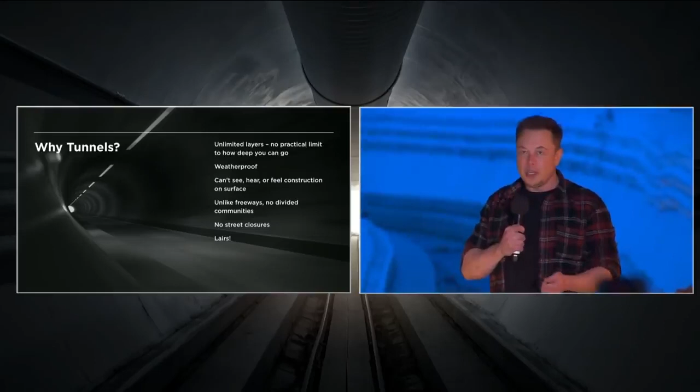You could go with a flying car, but there are some drawbacks to flying cars. They are essentially a helicopter with wheels. And they make a lot of noise, there's a lot of wind force, and the probability of something falling on your head if there are a bunch of flying cars around is much higher than if there are not.

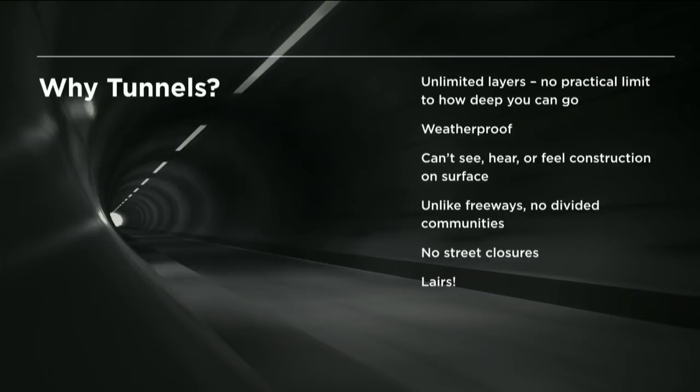But I think the great thing about tunnels is that there's no limit to how deep you can go. They're weatherproof, that's the other thing about flying cars - if there's snow or rain or a hurricane or something, suddenly you can't go anywhere. But tunnels are immune to weather. It does not matter if there's a tornado, it doesn't matter if there's an ice storm, it doesn't matter what's going on above ground. If you're in a tunnel, you're safe and secure.

The other thing is you can't see, hear, or feel the construction. When you ride the tunnel, you'll see the entrance that's basically in the backyard of a house. The neighbor of that house, when the boring machine broke through the other side, was watching TV. The neighbor did not even stop watching TV - that's how subtle it was. So you will not hear, see, or feel the tunnels being created.

Unlike freeways or any kind of surface transit, it will not divide communities. You don't have to basically railroad through communities. You can weave the boring system tunnel network into the fabric of a city without changing the character of the city. The city will still feel the same. You're not going to get in anyone's way, you're not going to obstruct anyone's view. You'll have this revolutionary transport system, and your city will still feel like your city.

And lairs, of course - forgot to mention lairs, plural.

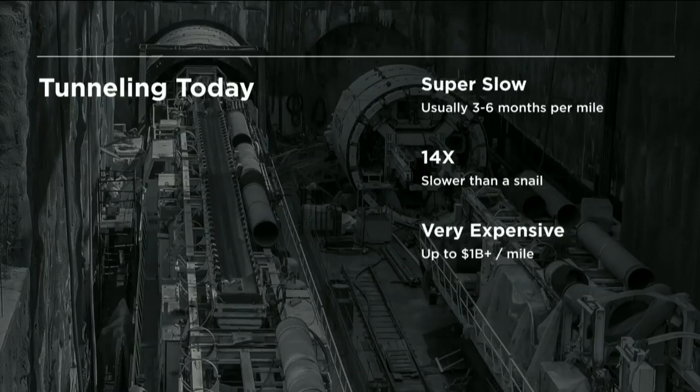So what's the problem with tunnels? They usually take a very long time to build, and they're very expensive. Typically, a tunnel will take 3 to 6 months per mile. In some cases, it will take a year per mile. And they can cost up to $1 billion per mile. In fact, the LA subway extension that just got completed cost $2 billion for 2.5 miles. There was a subway extension in New York that I think cost $2 billion for a mile. So clearly something needs to be done to revolutionize tunneling technology. We need to be able to build tunnels way faster and for a hell of a lot less money.

Just to characterize it, the fastest tunneling machine in the world right now is 14 times slower than a snail. So when I say we're gonna have a tunneling machine that can do a mile a week, we're not talking about the sandworms of Dune here, okay? It's still slow, it's just as fast as a snail - you will be able to escape it. All right, this is our snail. This is Gary the Sixth. Yeah, it turns out snails don't live that long, so this is Gary the Sixth.

But this is our goal. We must be faster than a snail. So what are we doing to increase the speed of tunneling?

As we got into it, we learned more and more about tunneling and why it takes a long time. First of all, in a given hour of tunneling, only about 10 minutes is spent actually digging. The other 50 minutes are spent erecting tunnel reinforcements, laying down tracks, doing logistics, and other stuff. So just automating the segment placement and solving the logistics issues will actually give you about a 5-fold increase in tunneling speed.

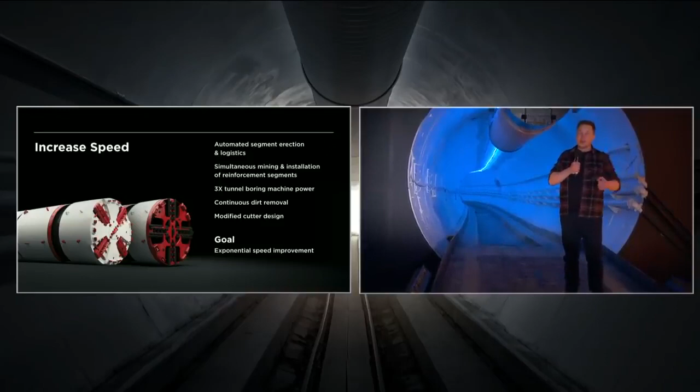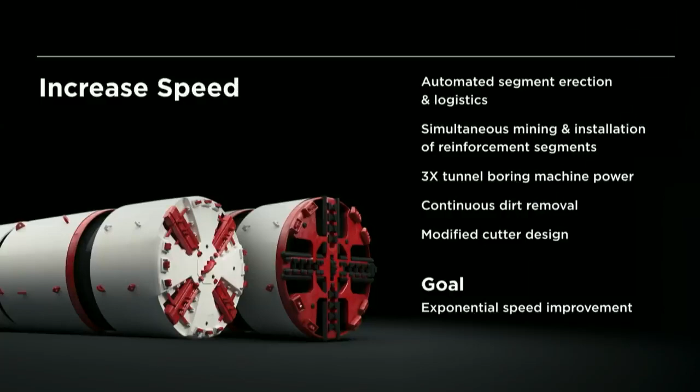The other thing that needs to happen is simultaneous drilling and tunnel reinforcing. You need to be able to drill and reinforce at the same time. Right now, all tunneling machines drill, stop, do a bunch of reinforcements, then drill, stop, do a bunch of reinforcements. So the combination of automated segment placement and being able to drill while reinforcing is about a 5-fold increase in speed.

Then with our design, we've also tripled the power of the drill, so it can drill 3 times faster. That results in a theoretical net speed increase of about 15 compared to the next best tunneling machine.

So hopefully we'll beat our snail. Aspirationally, we should be slightly faster than a snail after doing those things.

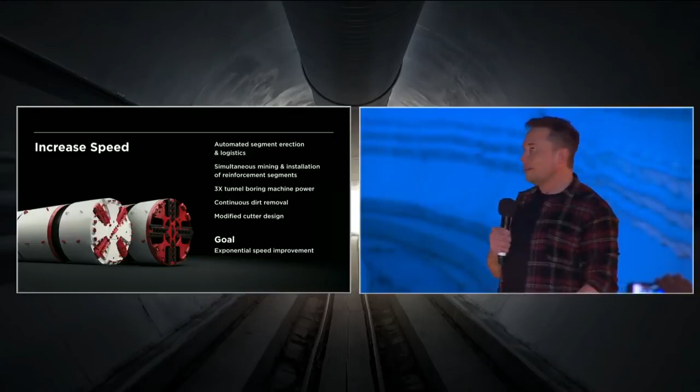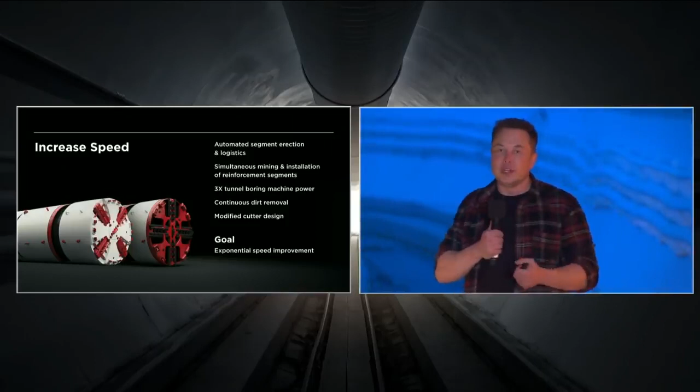And there's some other things. We've modified the cutter design. The dirt removal is continuous. There are 2 lanes instead of 1 lane. But we're very confident the engineering closes for achieving a 15x improvement, and we're actually building the machine that can do that right now.

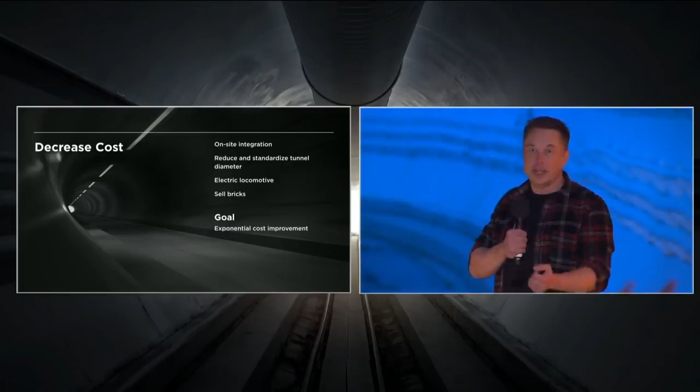And a few other things that decrease the cost of on-site integration, meaning building the tunnel reinforcing segments on-site instead of having them built far away and trucked in, using the dirt that we dig out of the tunnel to form the concrete for the reinforcing segments. So the steel reinforced concrete segments are 70% just dirt. But amazingly, in other tunneling situations, they actually truck the dirt from the tunnel out and truck new dirt in, which makes no sense. So we just use the dirt from the tunnel, add some cement and some steel, and create these reinforcing segments on site.

A lot of these things are really quite elementary, but are not done. Then we're having a narrower tunnel diameter, not having a gigantic tunnel, but just having a tunnel that is just right for vehicles, which is also important.

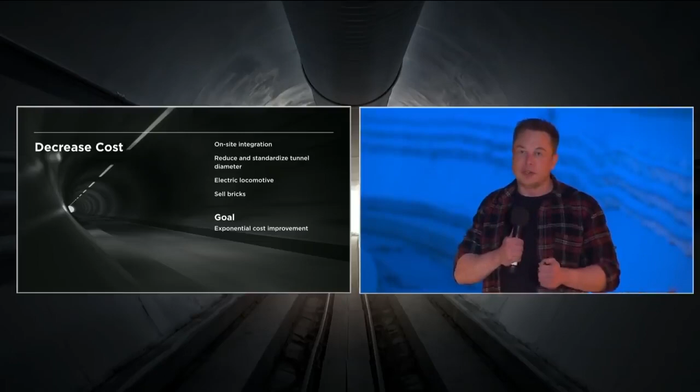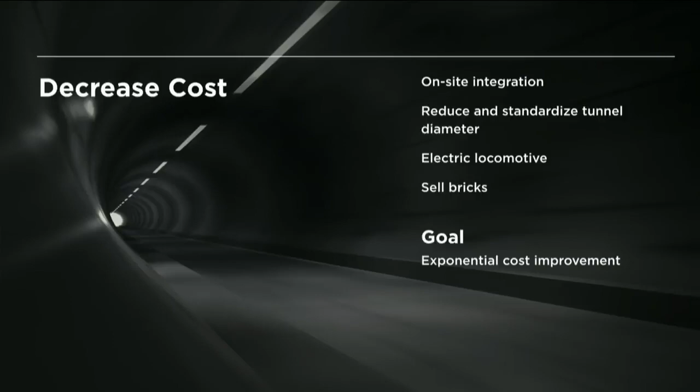We developed an electric locomotive, of course. It seems obvious, but other tunneling efforts use diesel locomotives, which is problematic in a tunnel because it absorbs all the oxygen and emits noxious gas. This is an obvious thing to make electric.

And then selling bricks, so I'll get more into that. About 15% of tunneling cost is just trucking the dirt out. So we thought, well, what can we do on site that would alleviate that dirt cost?

So we actually are just making bricks. We're going to make bricks out of the dirt from the tunnel and then sell the bricks. And we should be able to completely get rid of the dirt removal cost. Actually, depending on how many bricks we sell, the tunnel could actually pay for itself with just bricks.

So we'll be selling bricks at 10 cents a brick, which is less than at Home Depot, which I'm told is 25 cents a brick. So get your discount bricks here. It's going to be great. And then if anyone shows up and needs bricks for affordable housing, it's free.

We're going to do all sorts of brick kits with bricks that fit into each other, like giant-sized Lego kits. So you'll be able to build all sorts of things with bricks.

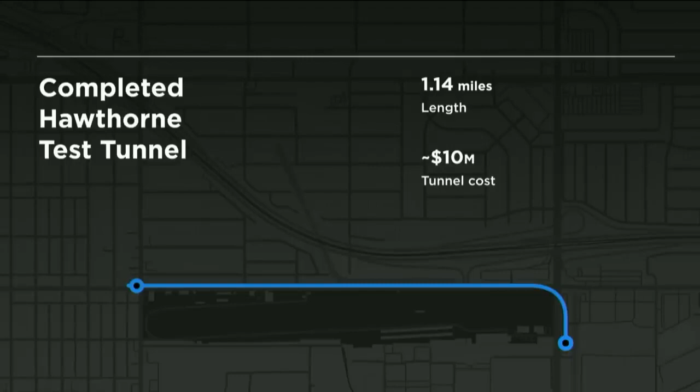So normally, tunnels cost up to $1 billion. A discount tunnel would be sort of $200 million. But we're able to build this tunnel for about $10 million.

I think this is a very important proof of concept for the technology. Building a tunnel in LA is like the tunnel equivalent of Broadway. We've got earthquakes, we've got oil and gas and methane in the soil, they still drill oil in LA, and you've got sandy, rocky soil. There's about a million regulatory agencies you have to satisfy. Essentially, if you can tunnel here, you can tunnel anywhere.

We have three tunnel products. One is the loop, for transportation pods, which you'll try out later today—that's a transport tunnel. We're also seeing a lot of interest in utility tunnels, where a municipality can get a big tunnel and put water mains and electricity lines inside, so if there's a water main break, instead of flooding the main street, they can go into the boring company tunnel and fix it. It saves cities a lot of grief. And then there's transport of water and sewage and stuff.

Yeah, we just dig holes in the ground.

The loop consists of autonomous electric vehicles combined with deployable guide wheels, so it braces itself against the side of the tunnel, keeping it safe even if the car loses power, somebody goes crazy, or there's a mechanical failure. Those guide wheels keep the car centered in the tunnel and ensure you can go through very fast and still be safe.

In terms of stations, the intent is to have many more stations than you'd have in a subway—at least 10 or 20 times more. This is important because you can intersperse the stations throughout the city and not dump a ton of traffic in one location. By having many stations, people get closer to their destination, and you don't disrupt the traffic pattern around where the loop exits. Depending on how much room you have, you can have an elevator, which only takes up a few parking spaces, or a spiral ramp or long ramp. Combine that with fast, low-cost tunnels, and you've got a very exciting transport solution.

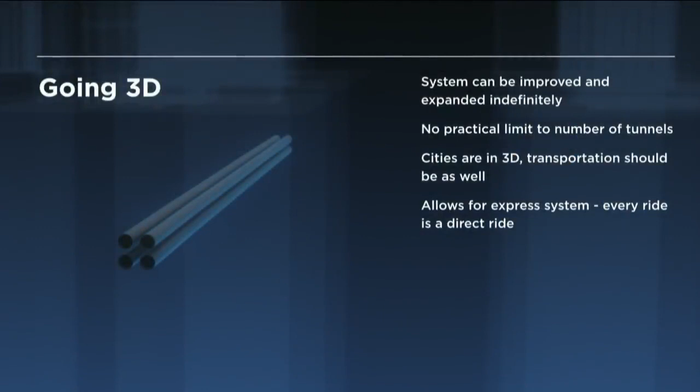Now, the thing about going 3D, as I mentioned earlier, is you can just keep expanding the number of tunnels. One question we're often asked is: sure, if you build this tunnel, people will use it, it'll get full, and we'll be back where we started—like adding a lane on the freeway, the traffic just expands to fill it. But with 3D, you could have 16 tunnels going in the same direction—you can have as many tunnels as you want. I'm pretty sure everyone in the United States isn't going to move to LA, but you could literally build enough tunnels to transport everyone in the United States in LA. There is no limit—this is very important. The system can be improved and expanded indefinitely. It's really about making transport 3D.

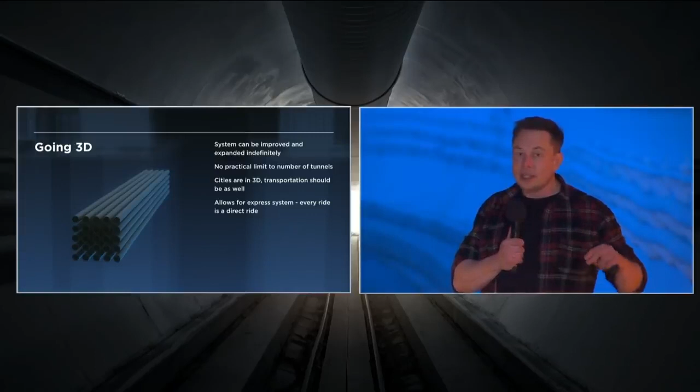The way it works is there'll be a main artery for the tunnel that travels at 150 miles an hour—kind of like an underground highway. A subway is like a bunch of stop streets, you keep stopping, so the average speed on a subway, including stops, is typically about 10 miles an hour. But the loop would have main arteries traveling at 150 miles an hour, and only when you want to exit would you take an off-ramp. So you can travel the vast majority of your journey without stopping at 150 miles an hour, only slowing down at your exit, then automatically transfer from one tunnel to another. It's like a 3D highway system underground, basically.

So that's the actual thing you will experience tonight.

For the elevators, the way we're doing it is we construct them off-site. They're prefabricated, self-contained steel structures. So in order to insert the elevator, all you do is dig a hole in the ground real fast, then bring the prefabricated elevator in sections, drop it down, connect the sections, and you're done. There's not some extended construction project. That's important, so you don't have these construction projects disrupting the city all over the place.

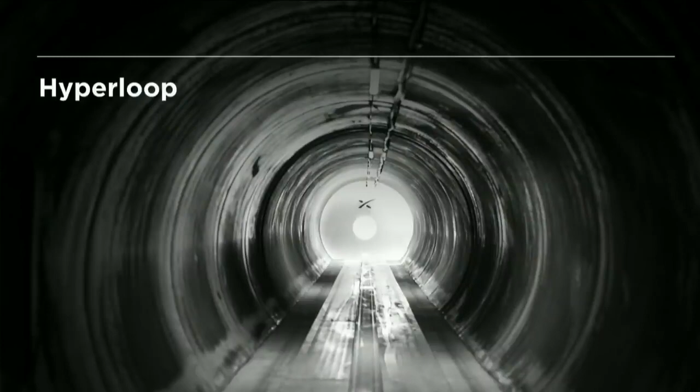And then one day it will connect to the Hyperloop. But that's for another time.

What I think this really amounts to is an actual solution to the soul-crushing burden of traffic. This is something that I think will actually work. It's scalable, and we have a demonstration tunnel here, and we expect to expand this over time to many cities all around the world, and give people more time for their friends and family.